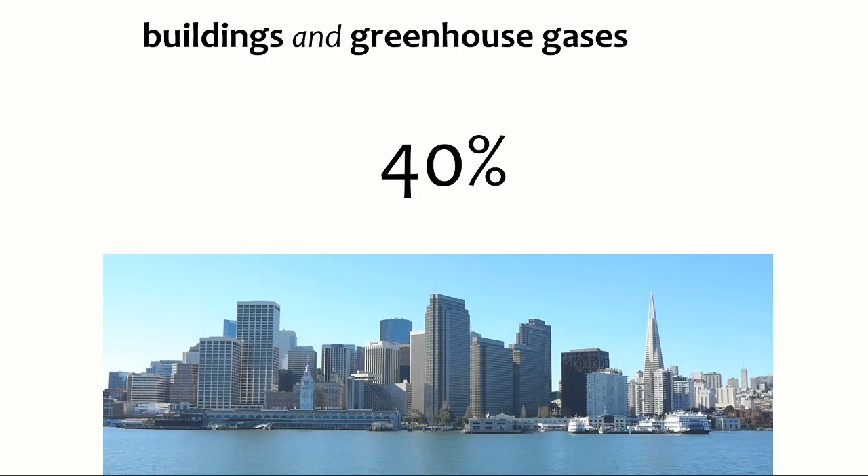The proportions are becoming very clear, and we can see where our targets are. Buildings, big chunk of the problem, and can be a big chunk of the solution. I want to start right off by challenging this notion, because perhaps in BayREN and LEED and USGBC and all sorts of organizations I've been around for 25 years, it's always been about energy efficiency. We're very focused on energy efficiency, and their presumption has been that that's equivalent to climate effectiveness.

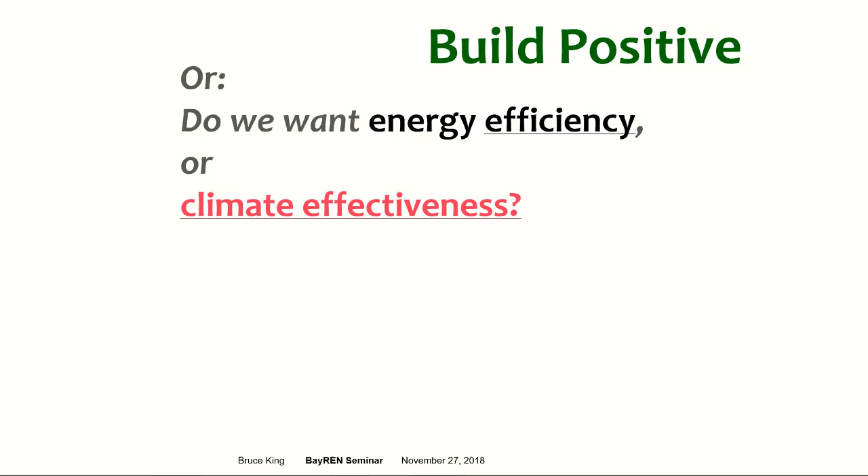And it's not. It just isn't. A lot of overlap, and most of the time it's the same thing, so keep doing energy efficiency, keep working on those retrofits and all of that. But there's times when they're not the same thing. Larry's firm did a study, and they found that putting that extra inch of foam insulation around the outside turned out to be the biggest climate villain in the project, even more than the concrete. So sometimes we do extra things to make a building efficient that aren't the best thing for the climate.

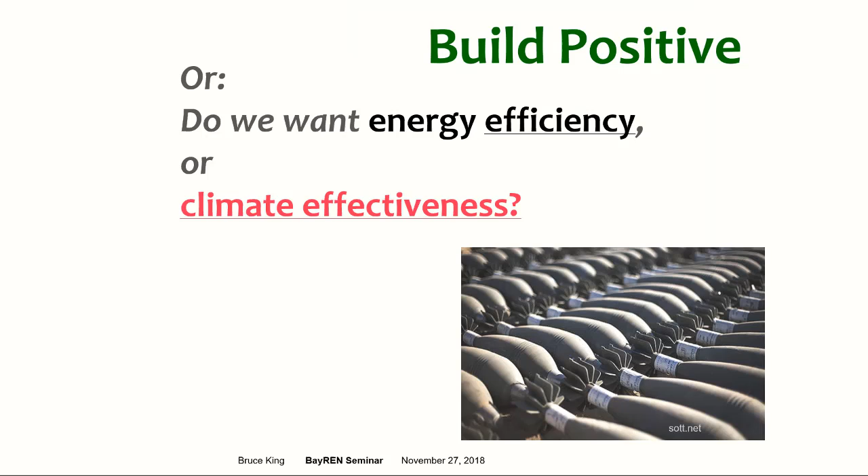Efficiency by itself is no virtue. It's just like technology, it can be used for good or bad. This is a picture of a bomb factory that the Islamic State turned from an agricultural equipment factory in Mosul into a bomb factory, famously efficiently, and they were quickly grinding out bombs. So efficiency isn't by itself a good thing.

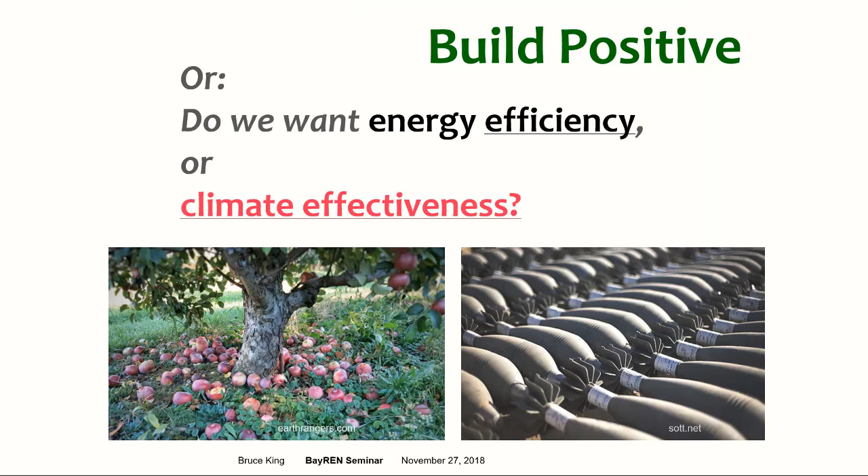By contrast, we look at nature. Have you ever been around a fruit tree at the height of its fruiting, and you see all this stuff on the ground? Well, that's not very efficient, is it? And yet somehow nature has managed to get by for several billion years, and here we all are. Everything about nature is kind of messy and inefficient, but it's very effective. So that's what we're really looking for.

Put differently, why do you want efficient buildings? I don't mean to be flippant in asking that, but it's worth looking at your fundamental purpose. Why do we want efficient? Who cares? What does it matter? I'm going to guess that for most of the people in this room, and the operator of this building, and most people who live in and run buildings, the energy bill is not a big deal.

What you pay to stay warm in the winter and cool in the summer is a relatively small part of your monthly budget. The exception being people who aren't as fortunate as you and I, who don't have a whole lot of money. And there are lots of cases like this one.

We've driven around places all over the Bay Area. People don't have a lot of money, or your brother hurt his back and he's out of luck now, and his whole family had to move in with you, and now there's 7 of you in an apartment, and there's the grandma who has arthritis and you got to keep her warm, and there's a new baby and all sorts of things. You have to keep the heat on, you have to keep the AC on. And there's all sorts of poor people in crummy rental housing around the state, around the world, who pay 25% of their income to keep grandma comfortable. Those really are the ones we're working towards with energy efficiency.

My energy bill is fine. This is coastal California, for gosh sakes. It just doesn't get that hot or cold.

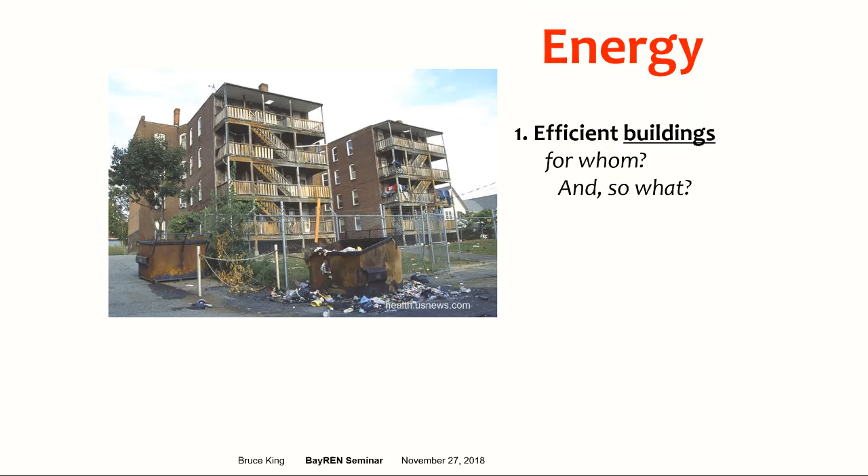But we're also interested in the Bay Area as a whole. This is what BayREN is about, is that as a whole, we don't use that much energy, that we become more and more independent of the grid, you might say. But we get to cheat a lot, right? Because we don't drill for natural gas right here in the Bay Area. We import most of our heavy industrial stuff and so on. So the accounting can be a little funny when we look at that.

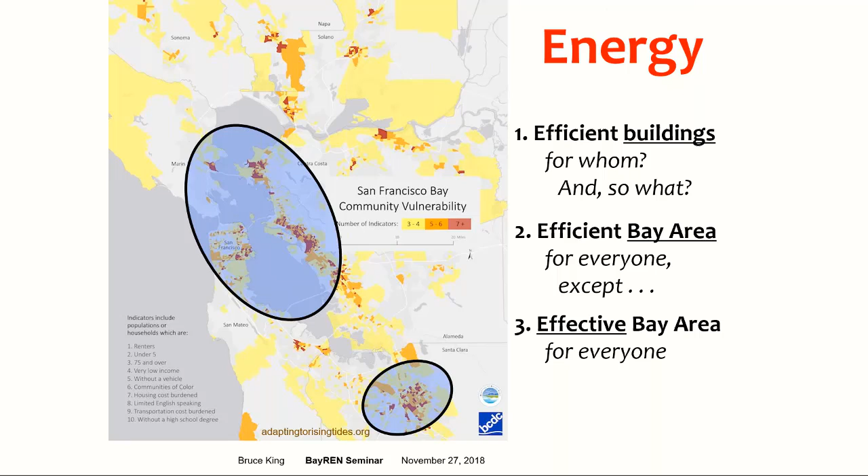So we're much more interested in climate effectiveness than energy efficiency. They're almost the same thing, but they're not. And it's really good to get clear about that, because the whole green building community is only starting to recognize that and act accordingly.

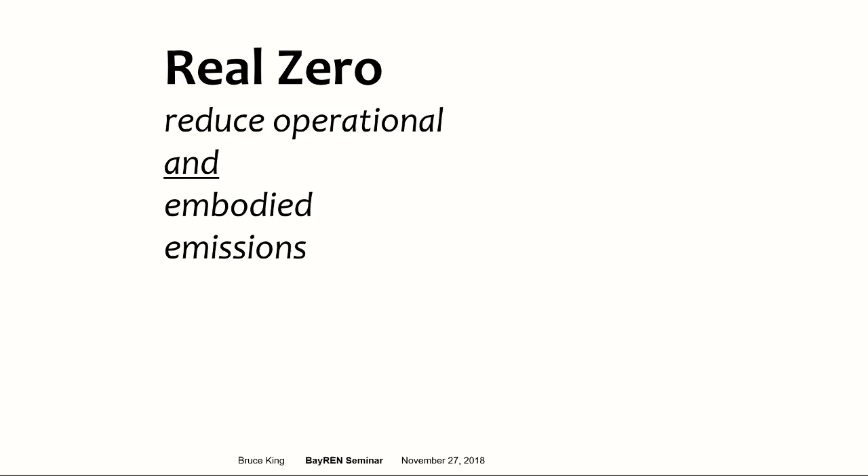So we want to do both. We want to reduce operational energy and embodied emissions, like Larry just talked about. It's not that hard to do, actually. But we also want to get to build positive. There are build-positive buildings now that have absorbed more carbon than they use. But so far, it's just a goal, a reach that we're looking towards.

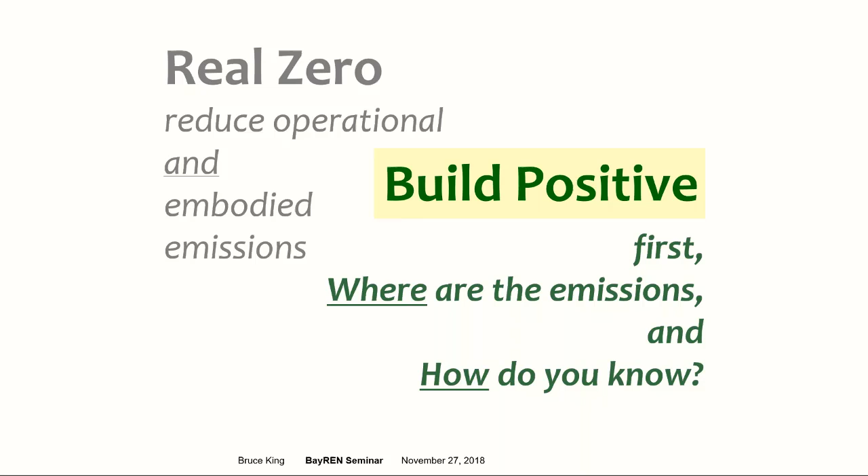How do you know where the emissions are? Lifecycle analysis, LCA. It's a specialty field now. It's something architects should be roughly familiar with, all of us should be roughly familiar with, but you basically have to spend a lot of time learning how to do it, or hire people who know how to do it. It's still an evolving field, different competing systems, competing data sets. It's a fuzzy, wild west sort of situation.

Nonetheless, we do have some accuracy, even if not precision, when we study buildings or materials or products to see what's the supply chain, how much went into the air as a result of having that yard of concrete or piece of carpeting or whatever you want to know about.

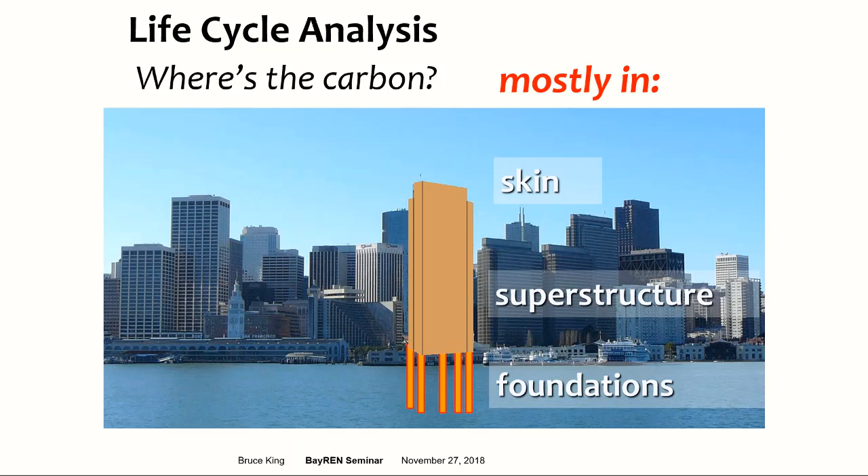As Larry said, with buildings generally, most of the carbon's in structure: foundations, the superstructure, and the skin. That's generally where most of the action is, and that applies to single-family houses, multifamily houses, to most buildings. Of course there are exceptions and it varies, but that's your general picture, so that's where we're focused. Or to put that differently, it's in structural materials, mainly concrete and steel. Concrete's the big one.

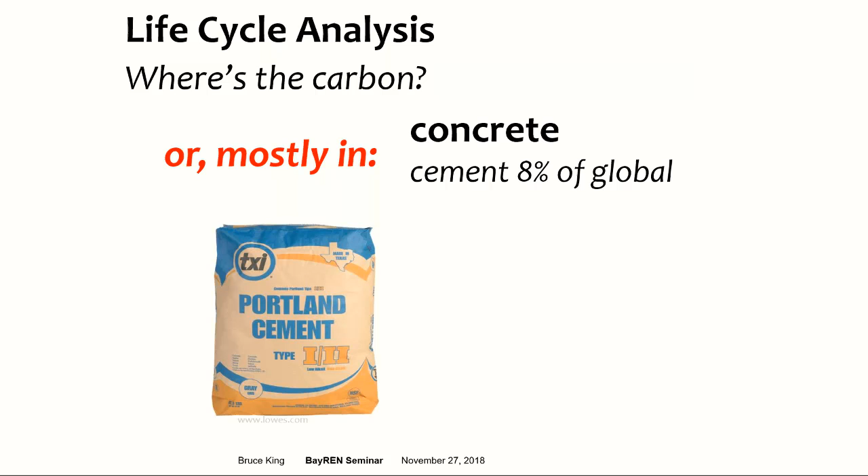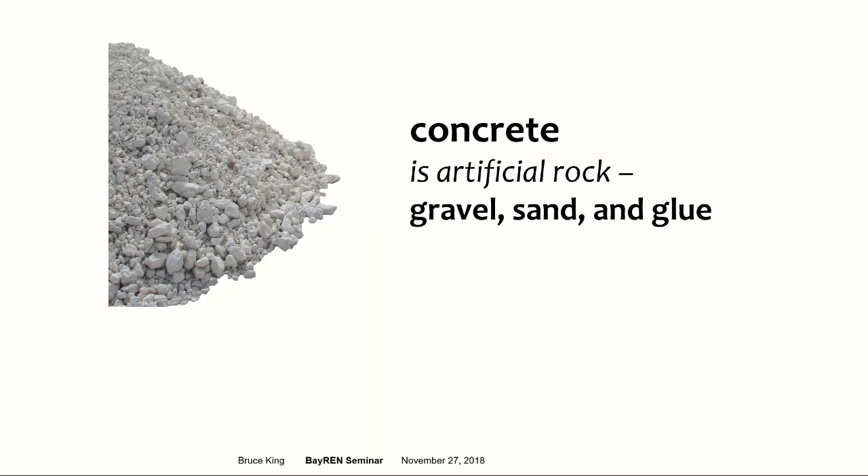It's artificial rock, that's all it is. Sand and gravel and glue. And then you pour them or spray them or pack them into place to get that column right there, or the floor underneath your feet, or the sidewalk you walk out onto today. For the last 200 years, since it was invented in England, we use Portland cement, which is highly baked limestone, and that accounts for 8% of global emissions.

Well, wouldn't it be? It's a great building product. It's a fantastic building product. That's why it took over the world. It's the most, by volume and dollar cost, the most common building material in the world. People love it. You can do anything with it. It just comes at this cost.

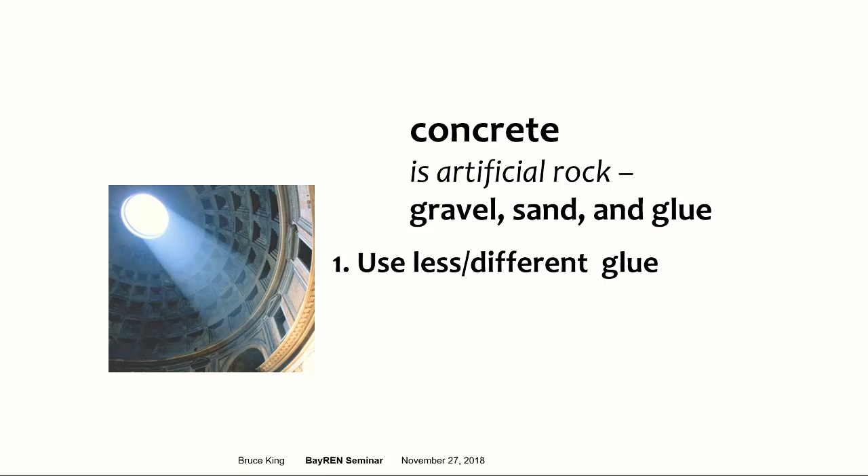So how do we reduce the footprint of concrete? Well, you can use different glue. There's people coming up with different cements, different ways to glue the sand and gravel together. There's a very simple notion.

Teach your engineer not to be moonstruck. Engineers specify concrete to have a certain strength at 28 days, because 100 years ago somebody figured out that concrete generally gets most of its strength in a month. And so that became this sacrosanct number, FC prime at 28 days, and every engineer just does that by rote. When in fact, most concrete doesn't have to come to strength for a long time. That column was poured, and it didn't know the weight it was designed for till at least a year later. Most concrete that gets poured has all the time in the world to come to strength. So if you just relax that requirement, you can save tons and tons of emissions just that way.

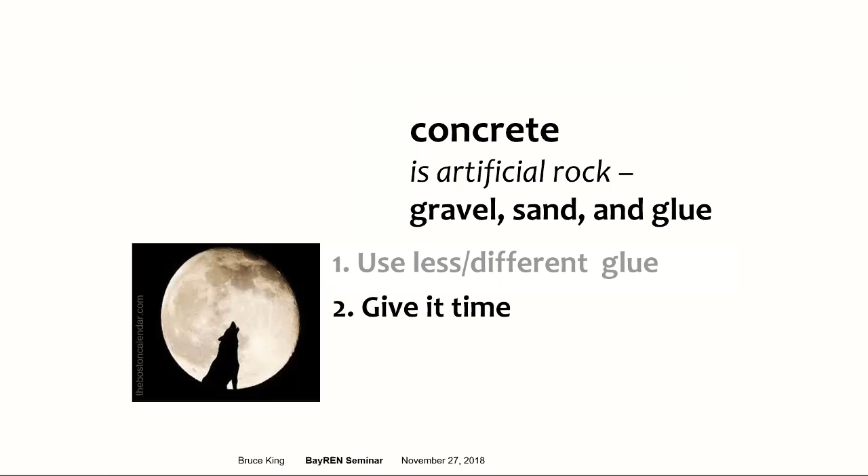You can feed it carbon, meaning you can make aggregate, sand and gravel, out of emissions from the power plant or the cement plant—artificial limestone aggregate. There's a company here in the Bay Area doing it, another one in England doing it. They're using some at the San Francisco airport.

You can also inject liquid or gaseous carbon into the mix as you're doing it. The Canadian company CarbonCure is doing this, and there are other versions of the same thing where you inject carbon dioxide into the wet concrete. It absorbs it, you get better concrete, stronger concrete, and it absorbs carbon.

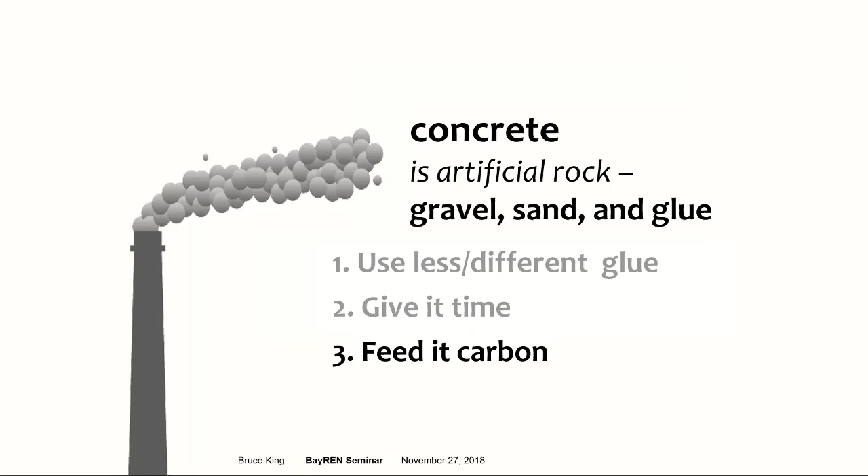And you can squeeze it. That's how the Romans made the Pantheon. That's how Romans made their concrete, in part—because they compressed it. They made it very dry and compressed it. What nowadays we call roller-compacted concrete, or in another terminology, rammed earth.

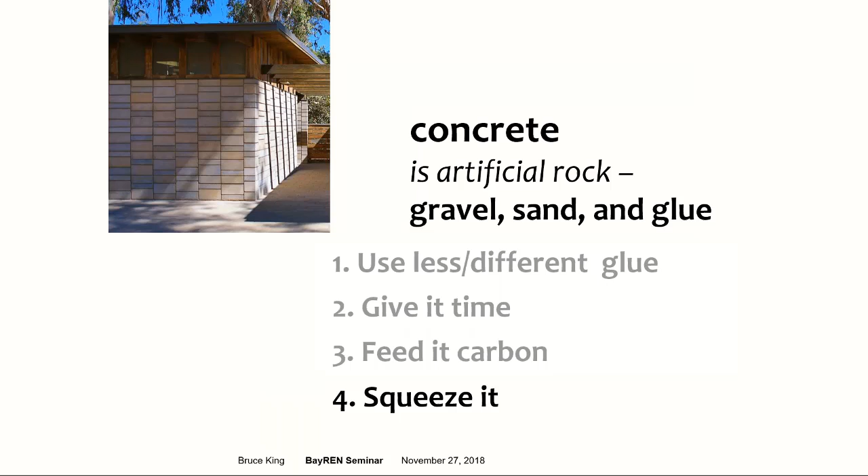David Easton up in Napa, who pioneered rammed earth construction in California decades ago and has done so much for that, wanted to make it more affordable and scalable. He's making concrete blocks with almost no cement—radically less carbon footprint than your ordinary CMU concrete block—using earth, pressure, and vibration. There are all sorts of ways you can reduce concrete's carbon footprint.

I'm just going to mention now, because my colleague Alice will be talking to you later about this in more detail, but we're starting to write a building code in Marin County in cahoots with StopWaste and Alameda County and others, that we hope we can spread around the world, actually, to constrain the amount of embodied carbon in a concrete mix.

To my knowledge, nobody's done that yet. All the green building standards say it'd be nice if you did this, and you can get a brownie point if you do so, but nowhere in the world is it law. So we're going to try to make it the law. You have to keep it down to a certain amount. It's doable. It's not going to add costs. That's what we're working on now.

And of course, the notion being, in Marin County, we hardly pour any concrete. I could fit in my coffee cup how much concrete we pour in Marin County. The idea, as I think you're all acutely aware, is what we do in the Bay Area spreads to California, what we do in California spreads to the country, and what we do in the country spreads to the world. We hope to start something here.

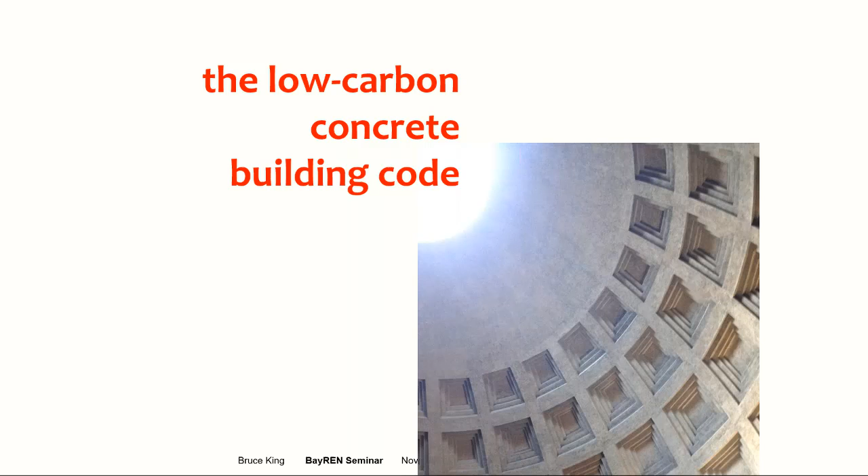Steel is another big one. Steel emissions are 7% of global emissions, and of that 7, half roughly goes into buildings. The other half goes into cars and refrigerators and Burning Man sculpture.

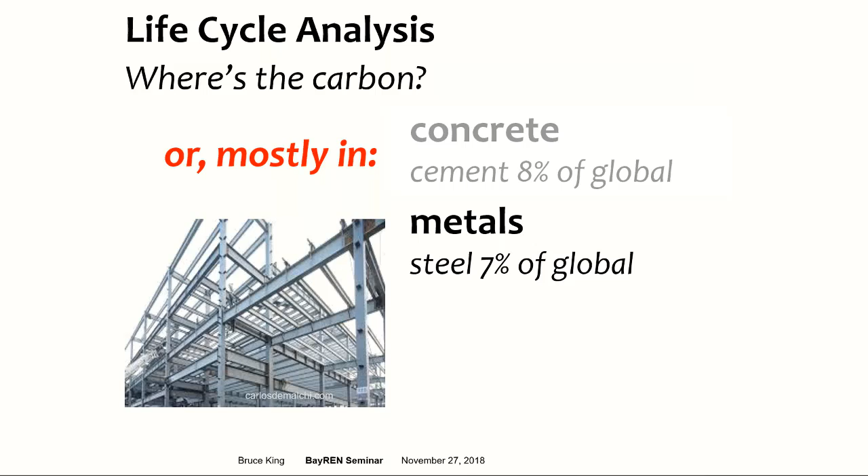And with steel, there aren't that many alternatives. We can now build with wood. You've heard of cross-laminated timber, perhaps, or mass timber structures. We can build high, large, all sorts of things with wood. Fabulous buildings, and also cheaper buildings using wood.

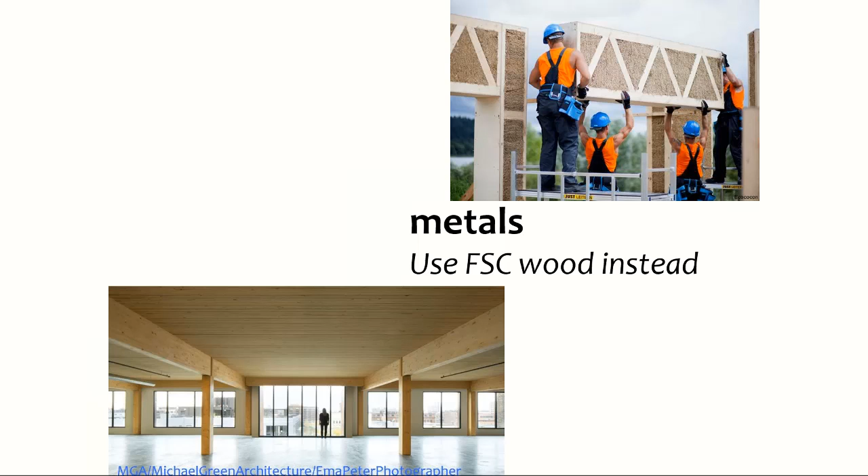The key is FSC, which stands for Forest Stewardship Council. It's an organization for certifying sustainably harvested lumber. That's a whole conversation in itself, but we can do things with wood that we used to do with steel, and it's a good idea.

Here's the big one. How many of you read Drawdown or know about Drawdown, Paul Hawken's book? I don't see every hand going up. Shame on you. Get Drawdown. It's really cool, well-researched look at what's the low-hanging fruit, what are the things we can do now to reverse climate disruption. It's full of surprises, and here's a plot ruiner: the number one thing is not solar panels, not organic agriculture, not all the things you might think it is.

It's refrigerants. It's the chemicals that we use for our HVAC, our air conditioning systems, our refrigerators and freezers. These chemicals are really nasty when they get out, and they eventually do get out. They have thousands of times the global warming potential of carbon dioxide. So they turn out to be a huge, huge climate button.

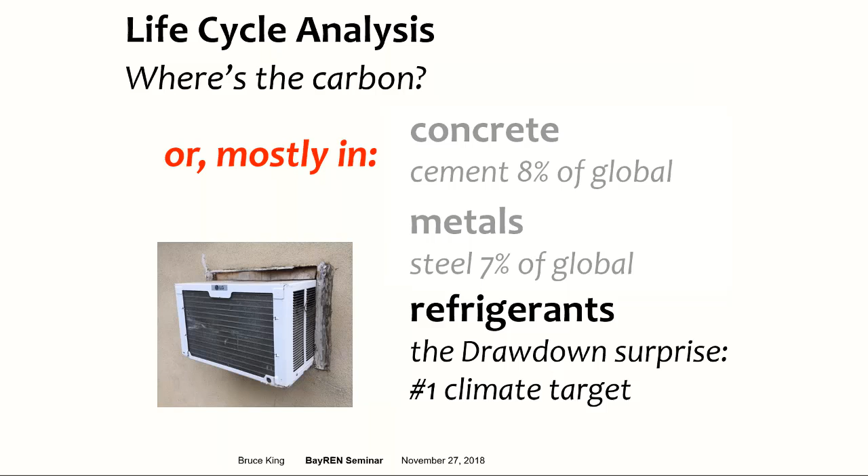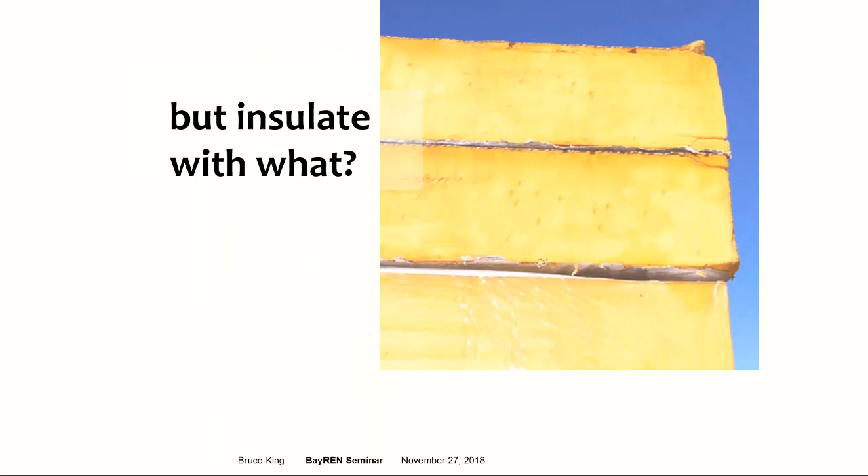So if that's the case, then obviously we should insulate all that much more so we don't have to buy as big an air conditioner. But that gets a little complicated because insulate with what? It turns out that our favorite insulation, as we try to get to net zero and efficient buildings, is foam, plastic foam of various sorts. And it turns out that that's made with the same kind of chemicals that we make refrigerators with, hydrofluorocarbons. Same thing.

It's a dilemma because those plastic foams, like in this picture, you can do stuff with them that you can't do with anything else. They're air sealed. They completely fill a stud cavity in a house. You can renovate old buildings with them. You gotta love them, except that you gotta hate them because they have a bad effect on the climate.

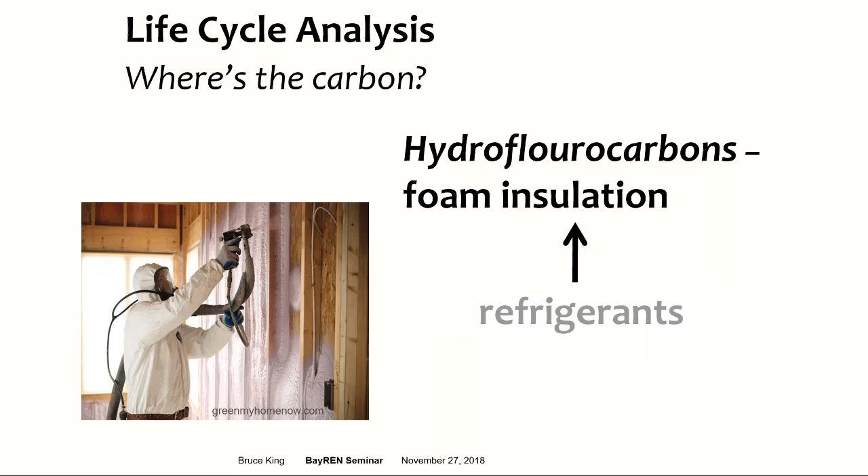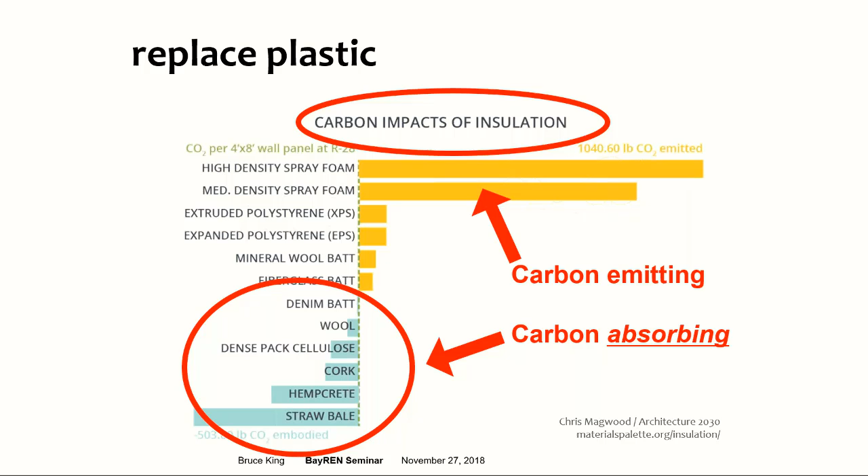Put differently, you can look at the carbon impacts of different insulations. This is from a colleague in Canada who came up with these numbers. You can have carbon emitting insulation or carbon absorbing insulation. That's up to you, but both are available now.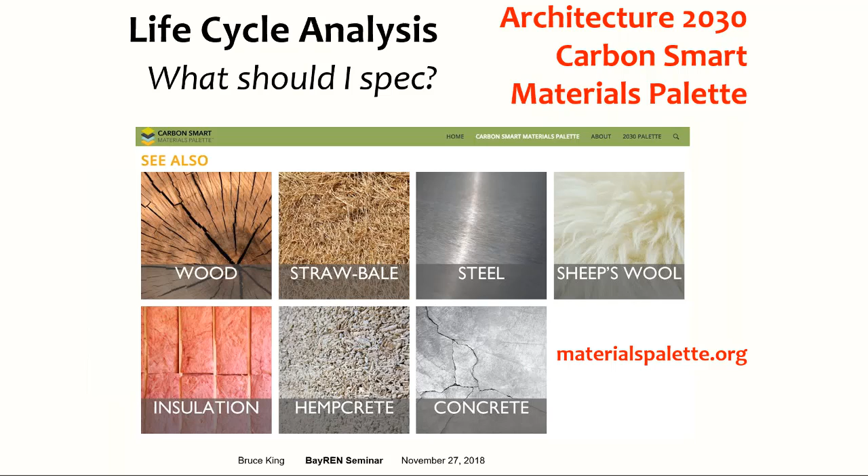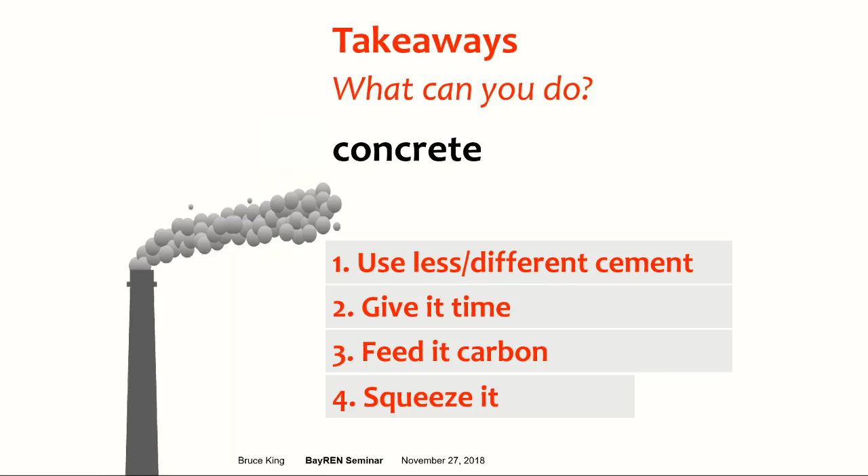So with concrete, there's all sorts of ways to lower its footprint. Conceivably, you can make it carbon sequestering concrete. With steel, you can replace it with wood. With refrigerants, insulate—and ideally not with the plastic foams, if you can manage it.

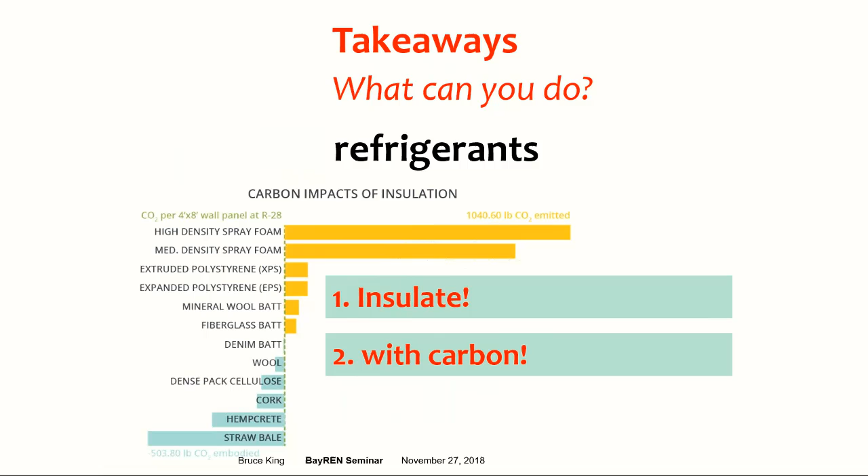Larry sort of talked about this. The folks at Architecture 2030 did the numbers and said what we're building right now in the world is the equivalent of another New York City, all 5 boroughs, every 35 days. That might seem like quite a lot because you don't see it. I don't see it. It's not happening here. It's happening in China and India and Brazil.

So if we can start something good here and get it all the way across the ocean, that would make a difference.

We're urban. I've been hanging out with the so-called natural building world, straw bale building, and a whole bunch of really fun people, a lot of whom are deluded to think that the answer is for everybody to build a nice little straw bale hut in the woods with a thatched roof and a couple solar panels and be off grid and everybody will be happy. That solved the problem. Except that doesn't really make a whole lot of sense. People are moving to cities. It doesn't really work for more than 0.5% of the world's population. It can't work. It's a bad idea because you end up driving up and down a dirt road, etc.

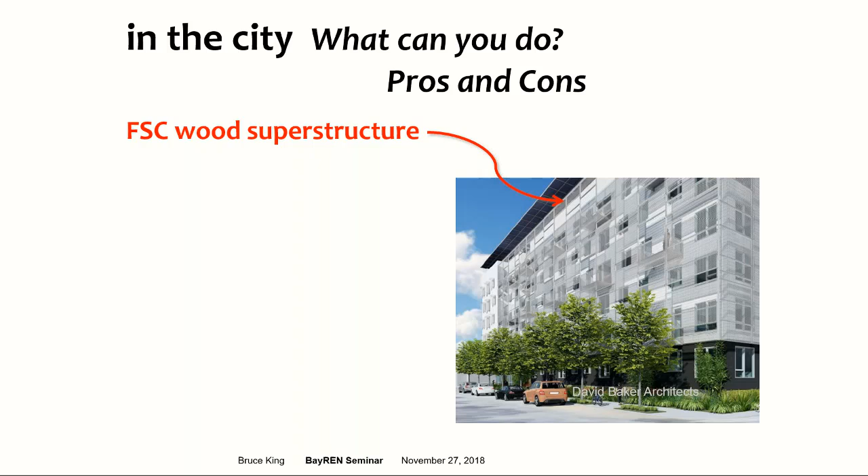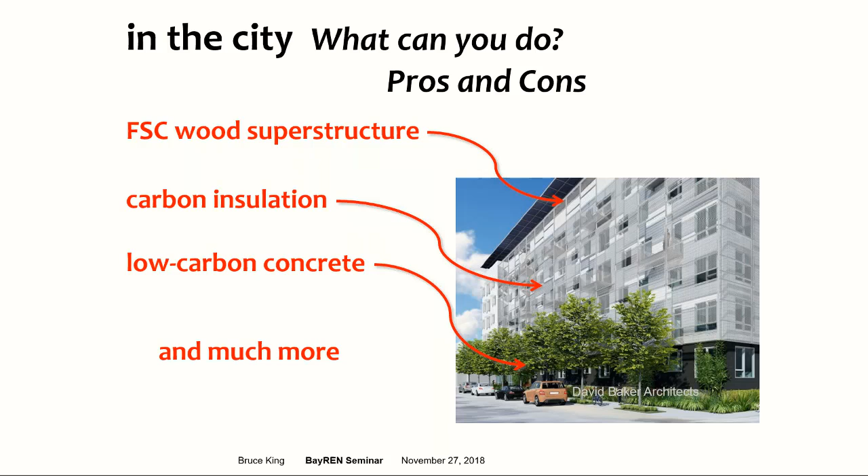I know that it's going to be a close to net zero building because it's David Baker Architects. That's what they do. But from the embodied point of view, you could have a wood structure rather than steel, or if you're framing it with wood, get FSC certified lumber. You can use carbon-based insulation rather than plastic foam. And you can use low-carbon concrete for the podium structure. There's all sorts of other things you can do. This, of course, is just a quick run-through. But I think you get the idea.

A lot of the technologies that are evolving for embodied carbon, for low-carbon construction and even carbon sequestering construction, they would go zooming forward if we just incented people. But there's no money in it right now. Till we put a price on carbon, all this stuff is basically constrained. It's hard to compete in the marketplace.

Carbon payback is just to reiterate what Larry alluded to before. You might have wondered what he meant when he said, what's the payback on some solar panels or a layer of insulation or something. It simply means if there's so much embodied carbon in it and it's going to save a certain amount per year, in how many years has it paid for itself from a carbon accounting point of view? This is a field we're only starting to articulate the question and think about, much less be able to answer it. When is it worthwhile? If a PV system on top of a building won't pay back for 15 years, is that worth it?

Probably, but we don't even know how to evaluate that one yet. Some things are obvious, no, don't do it. Some things are obvious, yes, do it. And there's a lot of things in between. So it's just part of the emerging scene. We're laying track as we ride the train here. And I think, well, I'm done.